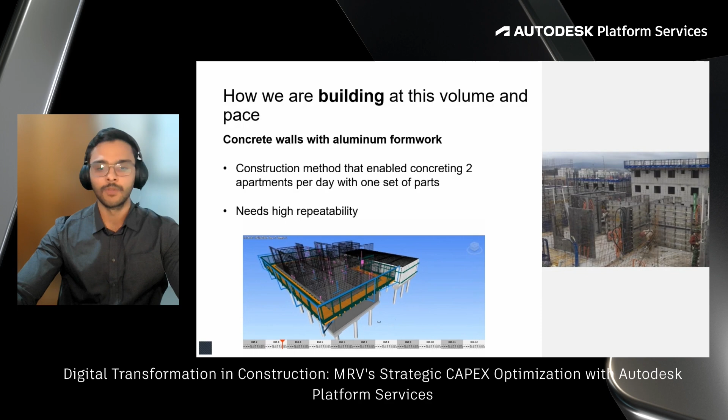So to achieve this optimization, our construction method is fundamental to understanding the challenge. We build using concrete walls with aluminum formwork. This method allows us to concrete 2 apartments per day with just one set of formwork parts, as you can see in this video. And the fundamental factor of this method is high repeatability. But the formwork requires consistent dimensions to be cost effective, which led us to our main challenge.

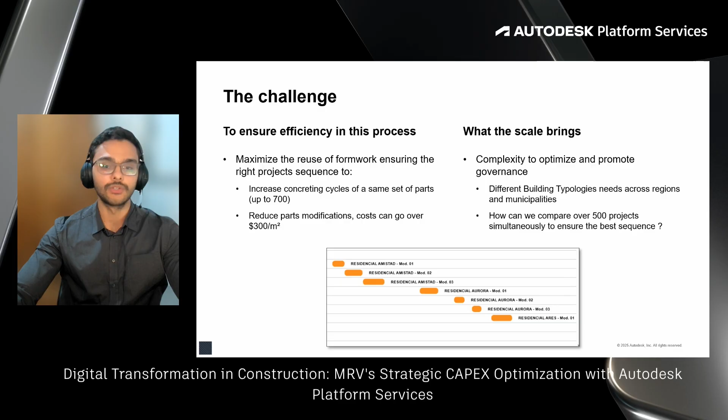So we need to maximize formwork reuse by optimizing project sequences. Our target is 700 cycles per formwork set, and when modifications are required, costs can reach $300 per square meter. The critical question became how to compare dimensional characteristics across 500 projects to ensure the best project sequence for formwork reuse.

So our solution is the SKU strategy, adapting the stock keeping unit concept from logistics to construction. We actually encode entire buildings into alphanumeric strings, capturing formwork critical dimensions. For example, in orange, 8UH indicates the apartments per floor, LE274 encodes the stair width, and CT4252 represents the total length.

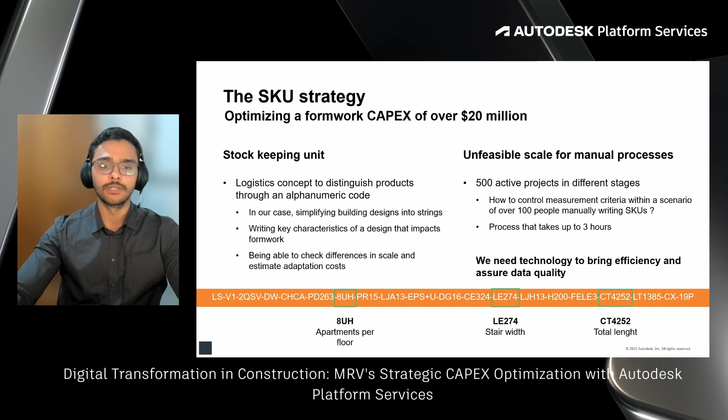However, the scale made manual processes unfeasible. With 500 active projects and over 100 professionals writing SKUs manually, it was nearly impossible to ensure consistency of measurements, and it required up to 3 hours of analysis per project. So this is where we turned to Revit API and Autodesk Platform Services to develop an automated solution.

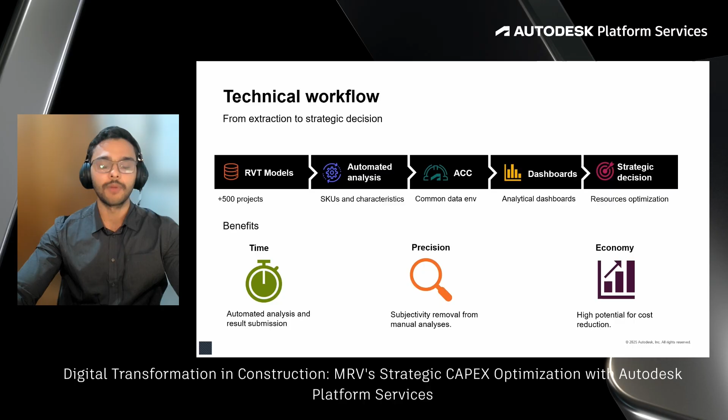So let me walk you through our technical workflow. We start with Revit models across all projects. These models go through an automated analysis process that extracts SKUs from each building. This data is stored in ACC. From there, we create analytical dashboards that enable data-driven decisions about resource allocation. Beyond time saving, we have achieved high precision and significantly reduced CapEx through optimized formwork utilization.

So let's take a look at our technical implementation in more detail, which works with 6 steps. First, using the Data Management API, the project's main model is located and opened in Revit. Once opened, the automation evaluates qualitative, quantitative, and mainly geometric data from all the files and generates the SKU code for each building. Still, with the same automation, it creates a hierarchy of buildings with SKUs in ACC's location service with its web API.

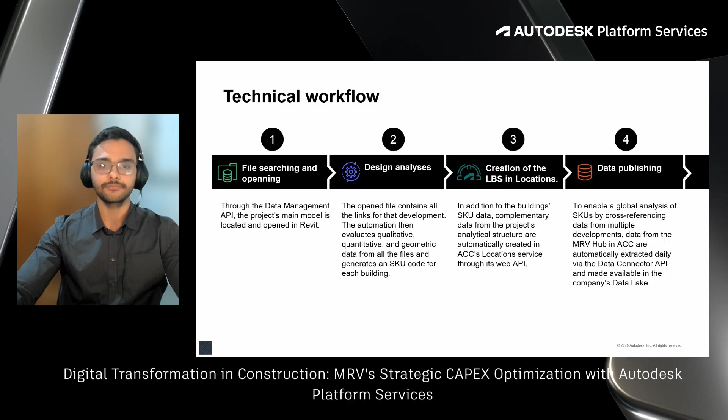Then, all locations of all projects and everything in our hub are extracted via the Data Connector API to our data lake. So with the data now in our data lake, we have built dashboards that provide a holistic view, enabling cross-project analysis. And the last step is issues propagation. So when construction teams identify a problem with a specific building type, the system identifies all projects with the same SKU code. For example, a formwork issue discovered in São Paulo triggers design reviews for identical buildings across the country. This is our complete workflow in detail with all features.

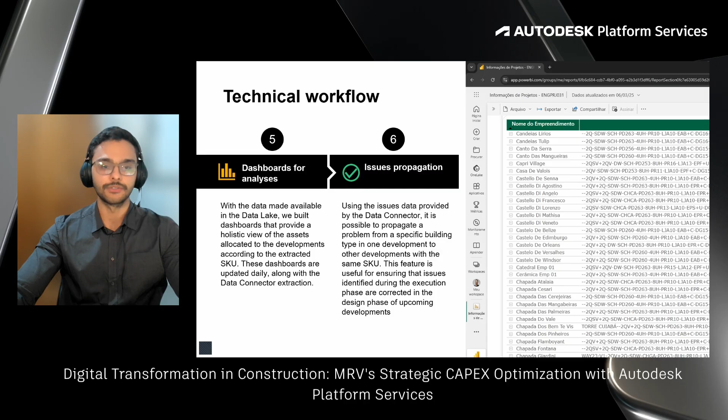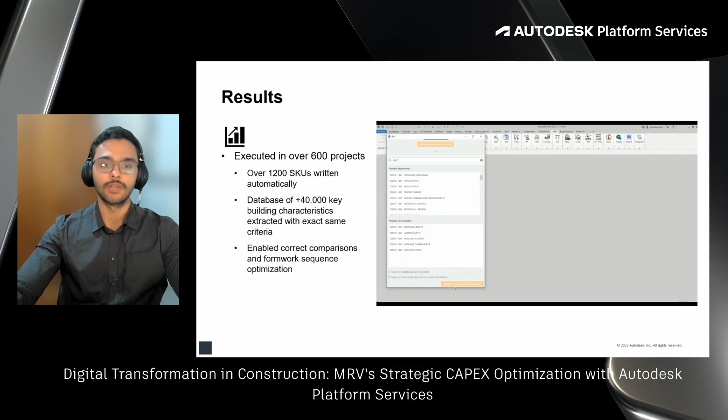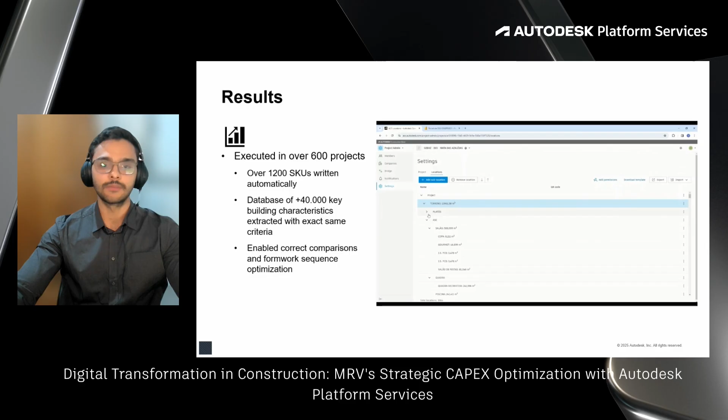Now about our results. In this video, you can see the whole process. First, the extraction running in Revit after selecting some projects. Next, the data made available in ACC's location service with SKUs and the hierarchy of buildings. And finally, the results dashboards in Power BI.

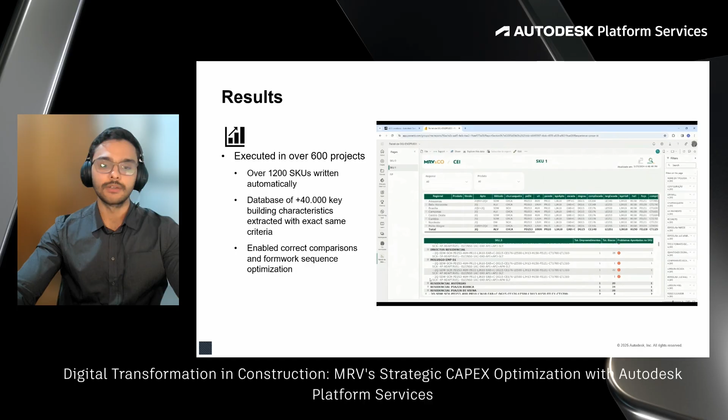This process has already run on more than 600 projects and generated more than 1,200 SKUs. Our database contains over 40,000 standardized building characteristics, all extracted consistently. And most importantly, we have optimized formwork sequences across our portfolio.

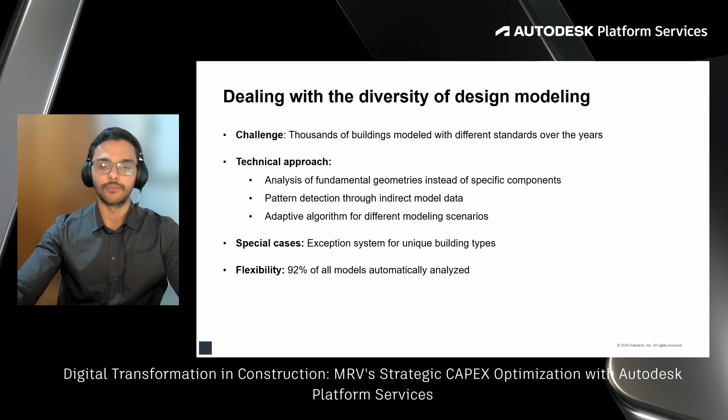Now, let me share the main technical challenge we faced when implementing the automated analysis system. A key challenge was handling building models created with different standards over the years. We developed algorithms focusing on fundamental geometries rather than specific components and element properties. Our approach detects patterns through indirect model data analysis, adapting to various modeling scenarios. The result is 92% of all models analyzed automatically, regardless of when or how they were created.

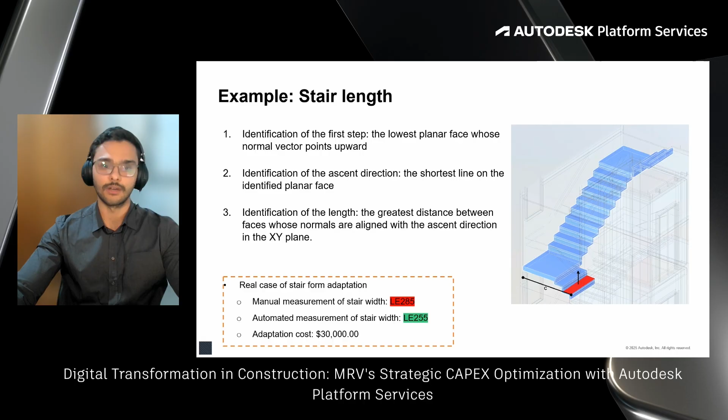Now, some technical insights from our implementation. First, prioritize business impact over perfection. What I mean is extract valuable data from existing models instead of requiring perfection or standardization. Second, develop algorithms that handle model inconsistencies. And third, enable cross-project analysis, because standardized metrics reveal opportunities invisible in isolated projects.

And before I conclude, let me share our technical roadmap. We will include data enrichment using the Model Properties API this year, and in 2026 with the Data Model API. Later this year, we will complete a development to compare the raw structure of buildings with high accuracy. And in 2026, we will execute our processes in the cloud through the Design Automation API.